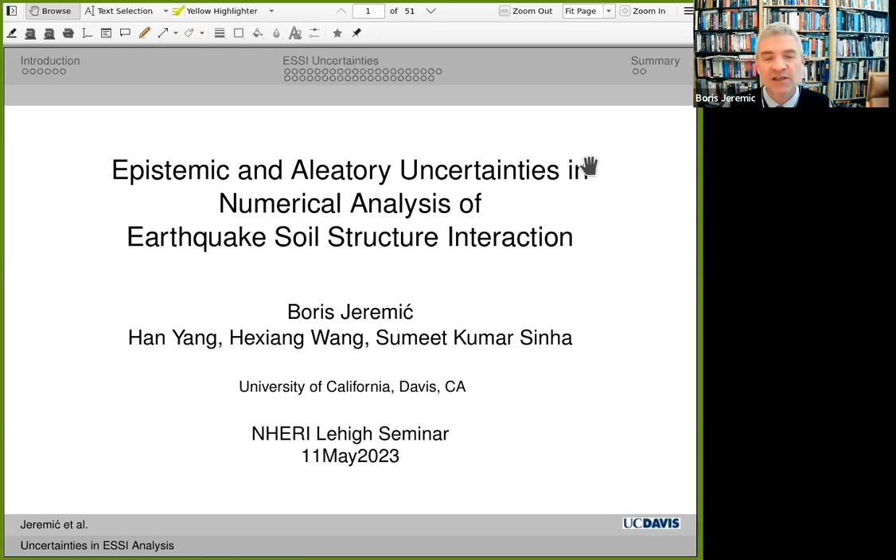So with that, I'll just go straight ahead. And the main interest really is to improve or to give engineers tools to improve safety and economy of infrastructure objects. We want to actually be able to improve the analysis, because at the end, everything is a model, and we need to decide on shapes and materials we use to design those objects and to assess their behavior. So we would like to improve the analysis for those objects.

And really the interest is in both statics and dynamics, but one of the most serious types of loading is earthquakes. And this applies to both soils and structures. In my view, there's no difference. You need to know soil, you need to know structure. You cannot separate those two.

There are essentially two main types of uncertainties that we have to deal with. The first one is what I call modeling uncertainties. Some of my senior colleagues tell me, well, it should be really called epistemic. And I agree, okay, fine. If people know them as epistemic, that's fine. But these are really modeling. I'll spend some time on those. And then of course, there are aleatory, there are parametric uncertainties. Our materials are variable, they're very uncertain, and we need to take that into account as well.

Our goal should be to predict and inform. We should be predicting and informing the audience, the engineers, because engineer needs to know. Engineer needs to know good news, bad news. Engineers need to know what is going to be the behavior of objects so that they can do what they need to do. They can improve them or change them or sign at the bottom of design drawings or not sign at the bottom of design drawings.

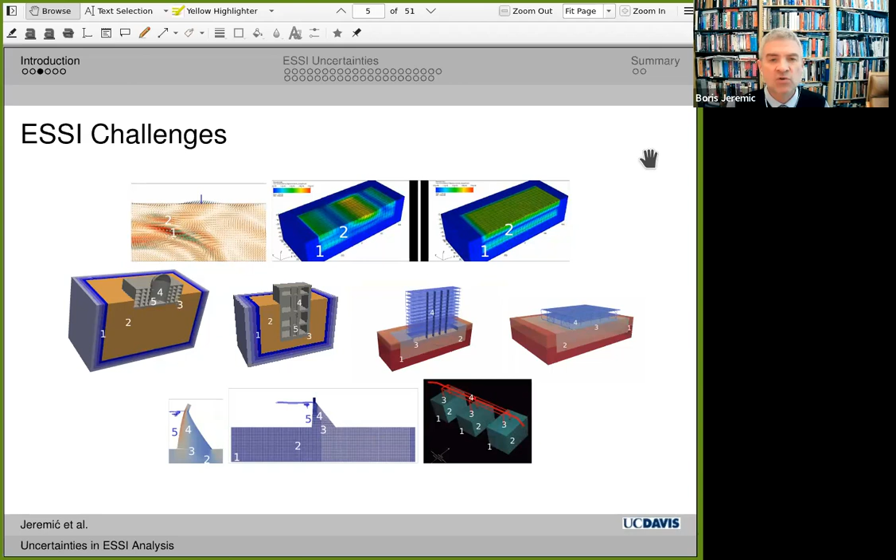And it's very similar for free field behavior, for interaction with some structures. Some important, some less important. They're all important, but some of them are very important, like nuclear power plants. Some of our buildings, and then of course dams and bridges. It's a very similar set of modeling tools, analysis tools or similar challenges that we need to address.

The two main types of uncertainties are really modeling uncertainties and parametric uncertainties. When we make those models, usually finite elements, we do make simplifications. We simplify models because there's no way we can model every single atom and so on. So we go from particles to solids and then to structures. But we need to be able to change modeling sophistication level so that we have a good confidence in our results. And then once you decide on the level of sophistication for your model, you have to propagate parametric uncertainties.

Our components of our system are very uncertain. Mostly stiffness, but also viscous damping part, and mass. They are uncertain. The loads are also very uncertain, and so we need to be able to propagate those uncertainties through the equations, through our behavior. And we would like to have the results be full probability distributions for everything, for displacements, velocities, accelerations, for stresses and strains, pretty much everything. And I'll show you we actually do that.

So let's focus a little bit on the modeling uncertainties. We have to sometimes simplify some of the important features. We used to have to do those. We don't have to do that anymore. There are good tools so that you don't need to simplify those out. And so, for example, the issue of one component motions versus three component motions.

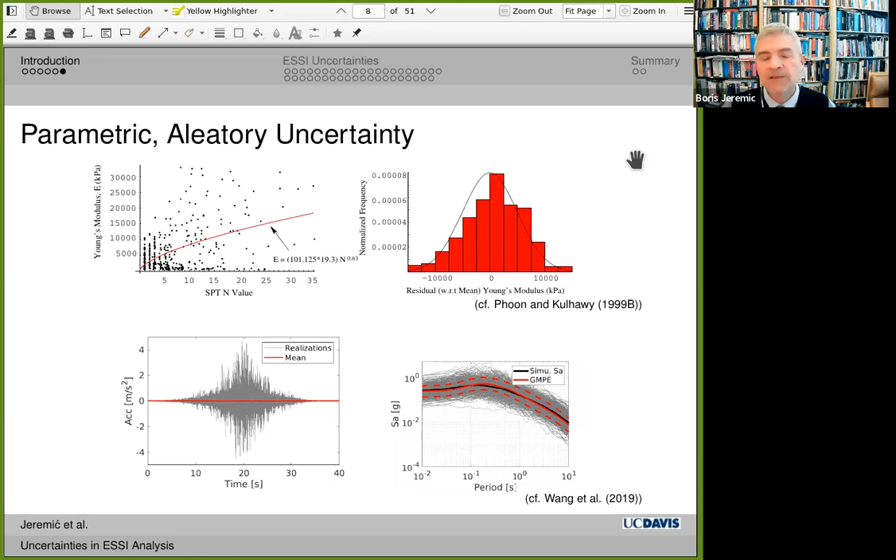So let's talk about some of these modeling uncertainties. I still call them modeling because that's close to my mind, but I understand they're epistemic. That's what they're called in mathematics circles. So, for example, do we use soil structure interaction or do we not? Well, there's sometimes a significant difference, sometimes not that significant. It's important that the engineer can show what the difference is and maybe neglect the influence of soil, but we can actually do much better nowadays.

Do we do one-dimensional, two-dimensional, or three-dimensional models? We can do nice three-dimensional models. Sometimes it doesn't make a difference, but you will not know unless you are actually able to do three-dimensional models. Seismic motions, I'll show a few examples. What if we just use one component motions? What does it do to our results? Are our results good enough for design and for assessment?

Elastic versus inelastic behavior. Again, material is always inelastic. Let the material decide if it wants to plastify or get damaged and so on or not. Let's not decide instead of the material what models to use. And then, of course, I'll briefly mention energy dissipation, because most of the damage and most of the behavior of soils, for example, and structural damage happens because of energy dissipation.

There's a trend to actually use viscous damping to model this energy dissipation. That is not quite right. The physics of viscous damping is very different than the physics of inelasticity. So it's important to use appropriate models for appropriate physics.

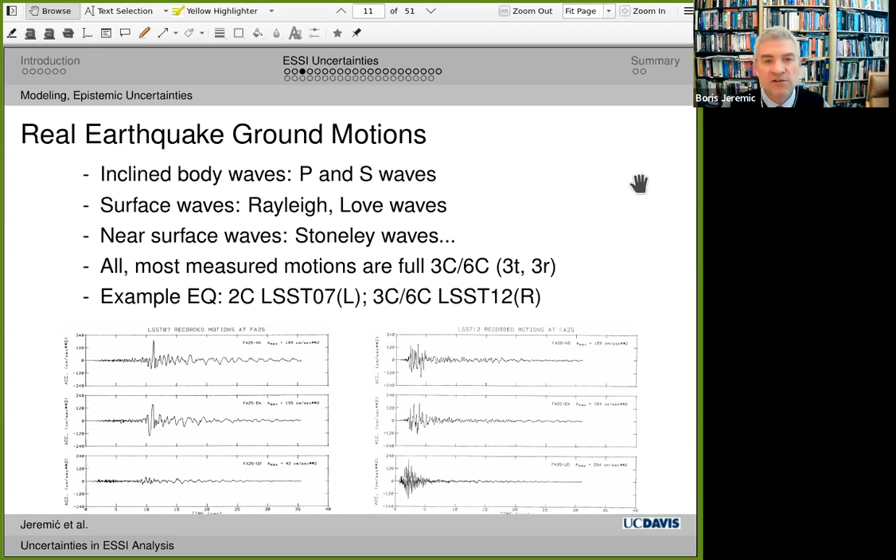And you see there's a full up and down. And the first part, remember, the first couple of seconds of up and down are essentially just the P wave. And then after that, it's a surface wave. So again, we know that motions are mostly six-component motions, three components plus three rotations. We need to be able to model those. So I'll show you a simple example we did just to demonstrate this.

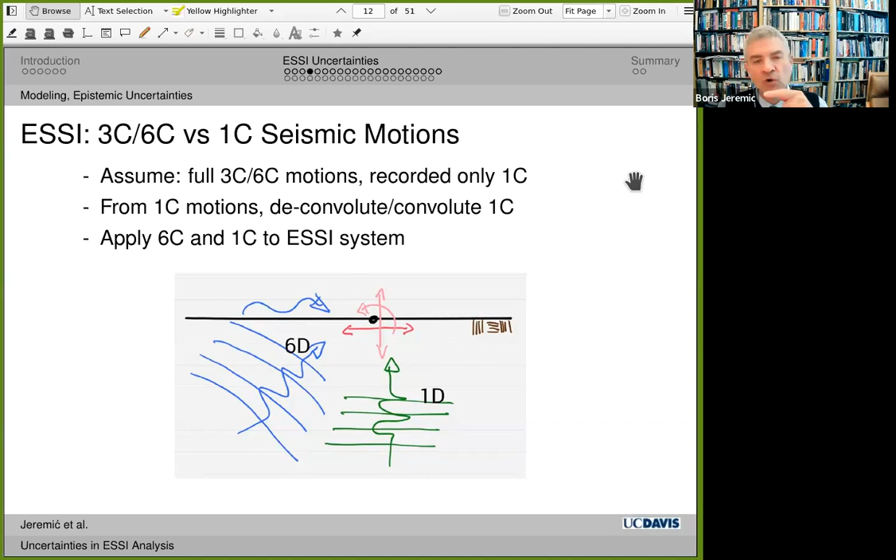Let's say that we have full three-component motions, but we only record one component. We just pretend that only one component is recorded. And then we can use that one component, do deconvolution, and propagate back as one-component motions. And this is how it looks. This is a simplified model we did just to demonstrate. Again, it's a very simplified model.

You can think of it as a regional scale model. There's a point source, which again is not quite true, but it serves the purpose. There are layers. There's a rock layer, there's a little stiffer layer of soil, and then a softer layer of soil. And the location you see on top where that line is, that's the location of the object. It's not an object, just a location.

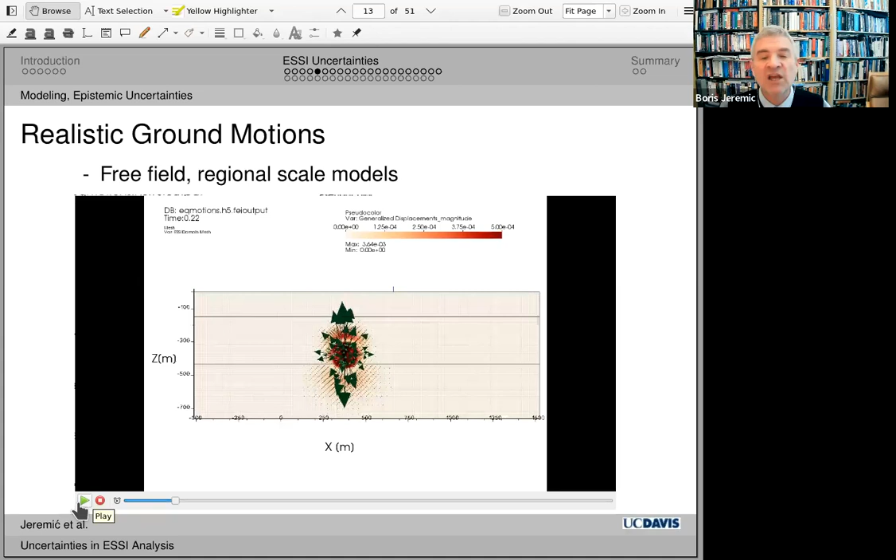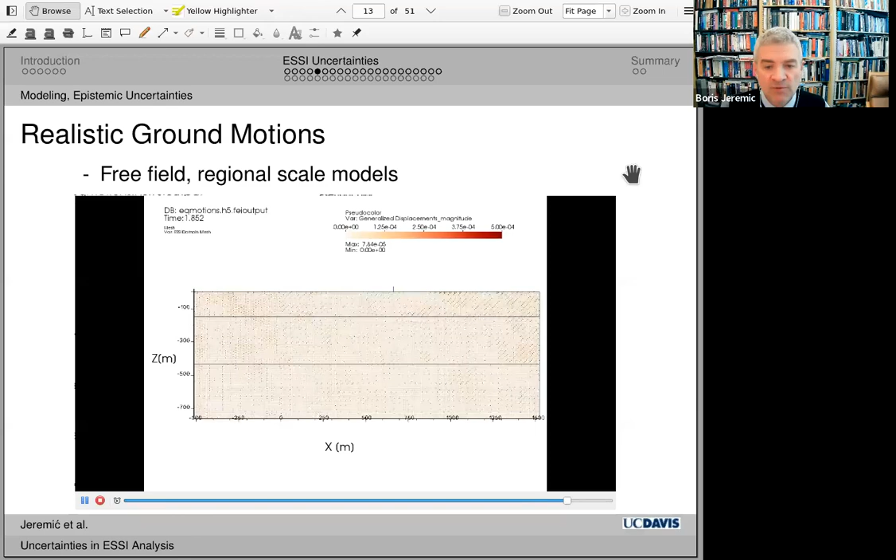But we can see that these motions propagate, and we see the reflections and refractions through the layers, and this is what we also observe a lot of times when we measure those motions. If I go close to this object here, this is how it looks. Please note that there will be a lot of these surface waves, and these are Rayleigh waves, the ones we teach students. These are the same ones we actually record.

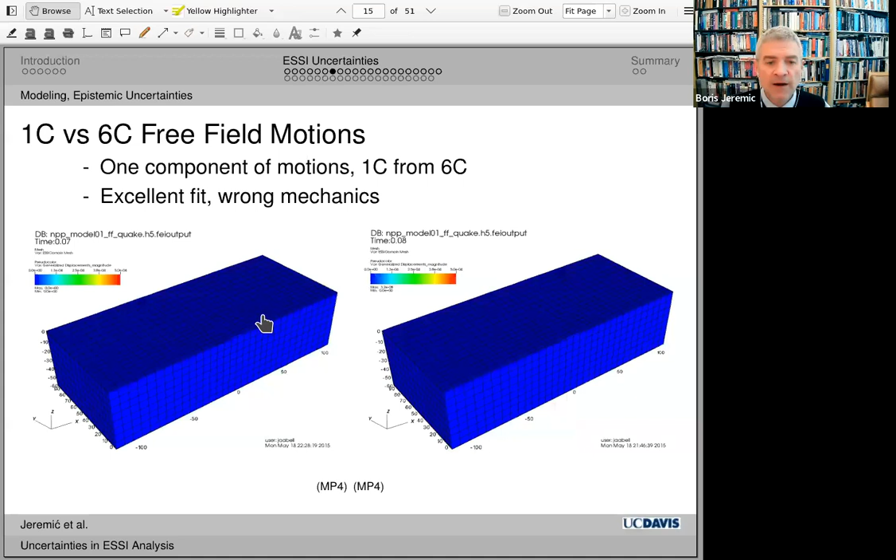So now, if I use these waves, this realistic wave field, a very simplified source but a very realistic wave field, I can input that into my free field model, and this is how it looks. This is input in the free field model using the domain reduction method Jacobo Bielak invented a little over 20 years ago. It's a beautiful method, the best method to input motions in any model. So this is how it looks in real life.

And then if I do the one-component motions, this is how it's going to look. I took those motions at the surface, and I pretended they're just one-component motions. Let's see how the system behaves, and it behaves like this. So the left one is the real motion, the right one is the one-component motion that we most of the time actually use.

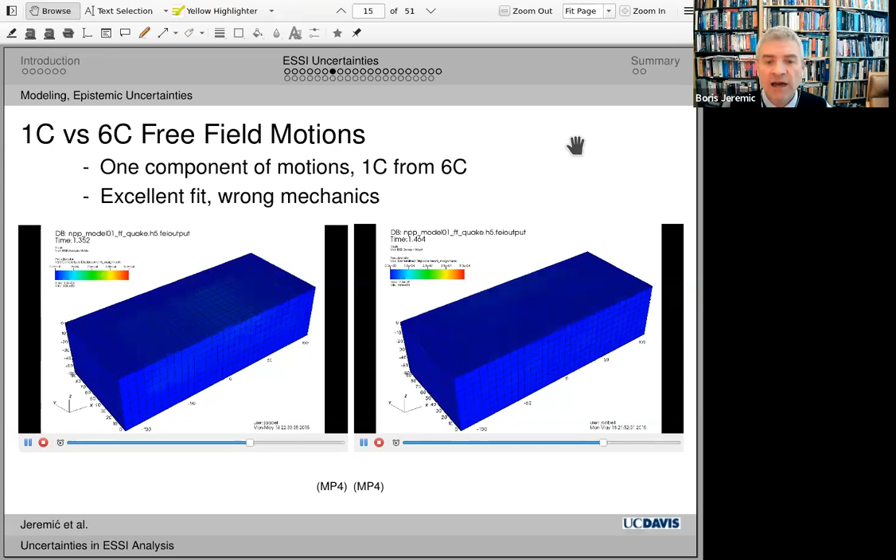And I would say that the physics between the motions on the left side and the motions on the right side is quite different, and I expect to see different behavior. How important that difference in behavior is, well, I can show that too. Here's an important object. Let it remain unnamed.

It's a full 3D model, but what we did in post-processing was take the left side, which shows the full three-dimensional motions, the 6-component motions, including rotations. The right side includes only those one-component motions, and you'll see the difference. It's a very different behavior. The left side has a lot of these vertical motions that come from the actual Rayleigh wave, from the surface wave. The right side does not have those. So again, the behavior is going to be quite different.

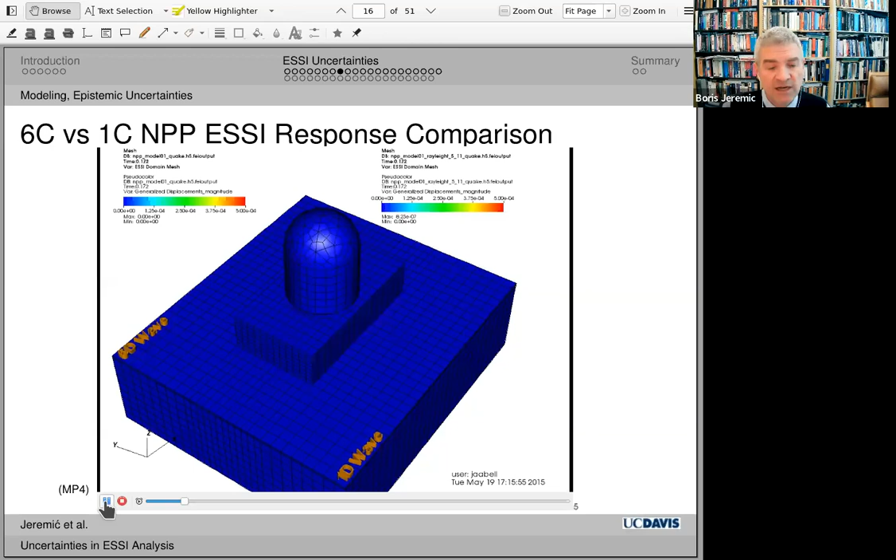And then I get questions: which one is on the safe side? Well, you can't say that. I mean, the safe side is the one on the left side, because the one on the left side shows realistic motions. The one on the right side shows unrealistic behavior from unrealistic motions.

So I would always take the more realistic behavior, because that helps me as an engineer to decide about the shapes and materials and so on for my object. And then, of course, again, the issue of wave fields, what kind of wave fields we use in modeling. So let's look at those so-called stress test motions.

In addition to these realistic motions that come from some depth or from some real earthquakes, which we developed by essentially doing regional scale models, or, now we actually have a methodology that by using some surface measurements, we can actually develop a full wave field at depth, and we can propagate that back in there. What we can also do is we can propagate some analytic wave fields.

There's a set of papers by Thomson, and then there's another set of papers by Haskell from the 1950s. 1950 Thomson and 1953 Haskell, where they provide closed-form solutions for layered media for the inclined wave, and we use that to input through DRM into our model.

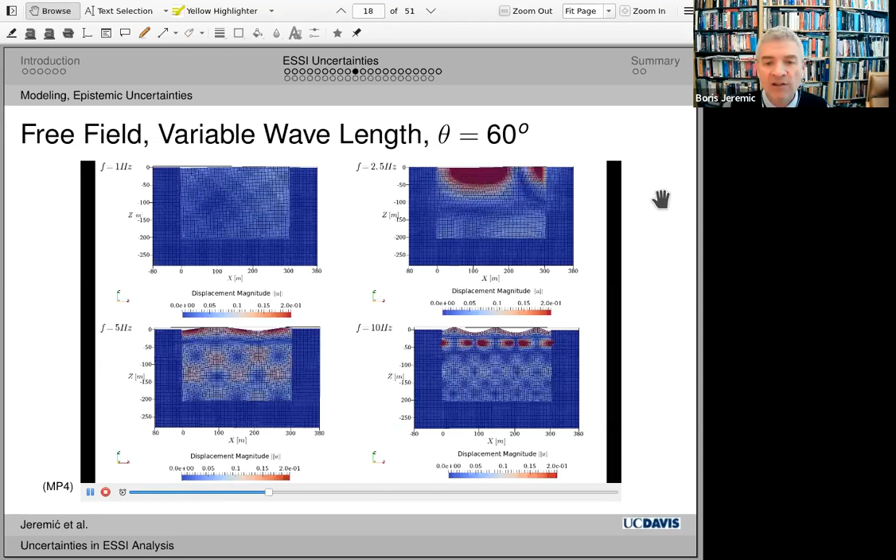And of course, the wavelength is going to make a difference depending on the size of the object. And so your object might not even see some of the waves depending on the stiffness, of course. But this is important. Those high frequencies become very important for industrial objects. So behavior can be very different, and you need to be able to model that.

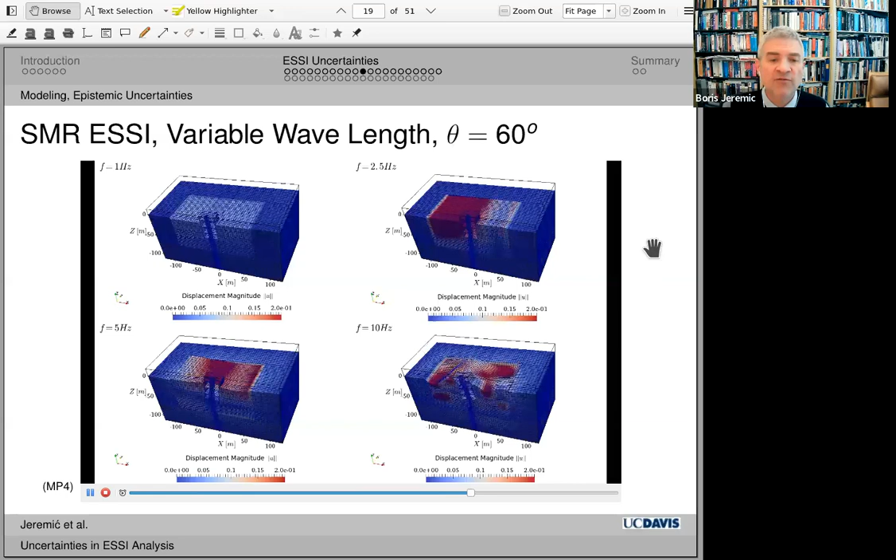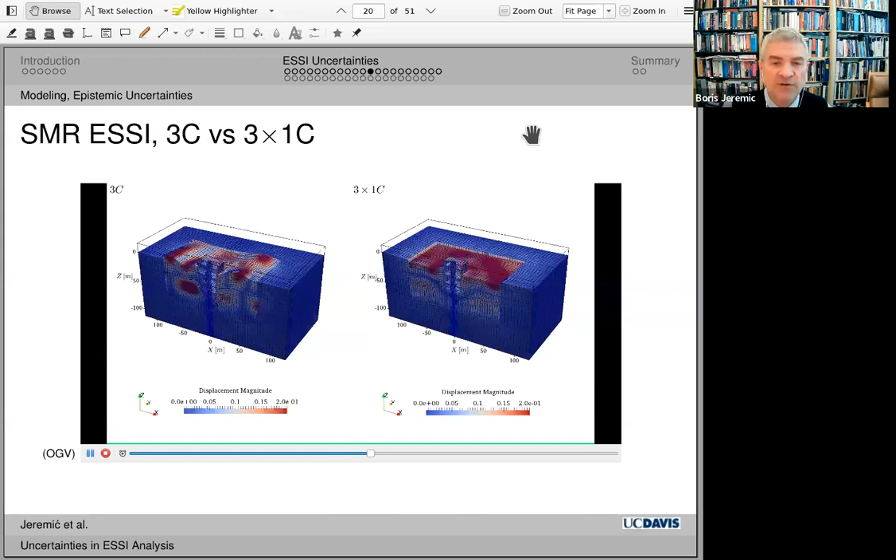And then, of course, the big discussion, should you use SSI or non-SSI? Well, soil is always down there. You can't get rid of it, soil or rock. They say if it's a very hard rock, you don't need to. Well, there are differences, sometimes more significant. If it's soil, the differences are always significant.

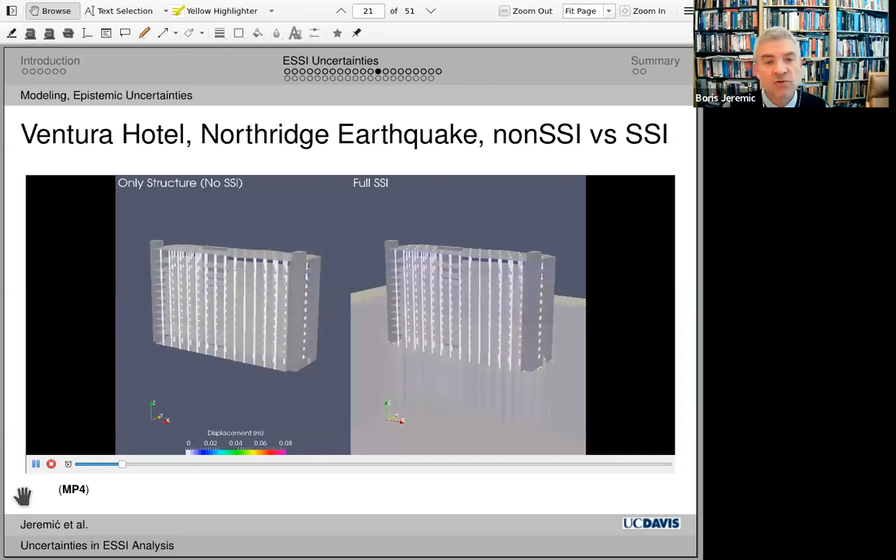This is an example, the Ventura Hotel, a famous hotel in Southern California that was shaken a few times. We did an elaborate model of this hotel, and we did an SSI and a non-SSI model, and we compared with some of the motions that were recorded, and the full SSI model does really well. The non-SSI model doesn't do well. You can fiddle with parameters, you can do this, you can do that, but it doesn't do well. So the conclusion is that you need to do full SSI just to get the good behavior of models.

So the energy dissipation. The energy dissipation is important because that's what brings damage to our systems. And we can calculate the energy input using DRM, and then we can calculate different ways of dissipating energy in the system. And there's radiation damping that we know about, but then there's also all sorts of energy dissipation and conversions inside the SSI system, and those are really important because they are the ones that bring either settlement in soil or some slippage in soil or damage in structures. And so we need to be able to model those properly.

And of course, there's one component that is rarely taken into account. It's numerical damping. Whenever you use Newmark or HHT or any of those methods to integrate in time, you dissipate energy in the system numerically. You can even produce energy, and you need to be able to control that. And this is important to control. And we can control that. We have a way of controlling.

We have a way of analytically calculating energy dissipation at every single Gauss point, every single finite element, and we can plot those and we can show what they are. And then, of course, engineers should be able to go back and forth and learn about where the energy dissipates and what's the influence of numerical damping, what's the influence of viscous damping, how to choose those parameters. That's important.

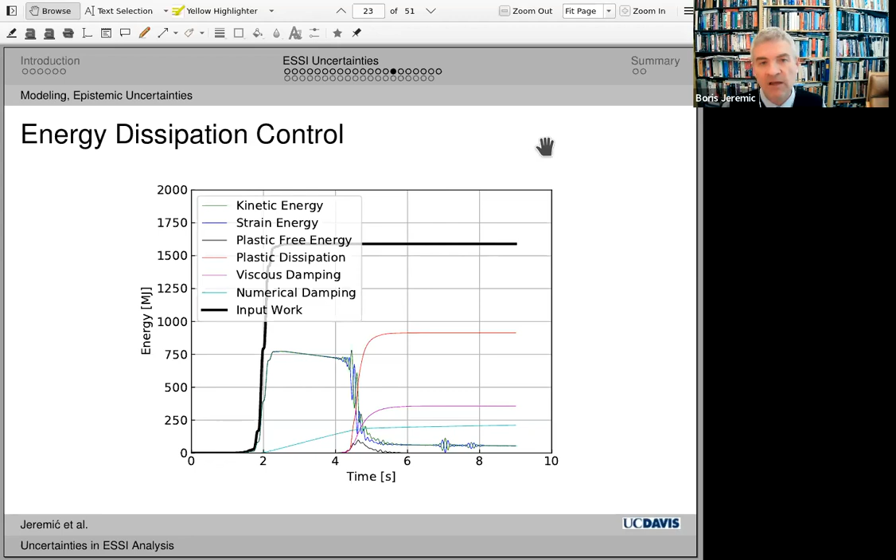One really important note here is that the plastic energy dissipation is not the same as plastic work. The stress strain loop is not plastic dissipation. My applied mechanics colleagues know this, and I remember when I talked to one of the colleagues across the hall, he said, of course, everybody knows this. I realized this maybe 10, 15 years ago, and I was shocked because I thought that the stress strain loop or load displacement loop is actually plastic dissipation. It is not, it's plastic work. There's something called a plastic free energy that's missing.

And this was shown by a fellow named Geoffrey Taylor 100 years ago. He has a series of papers starting in 1925, I think the last one came in 1934. They did some tests on copper. He showed this, and applied mechanics people know this. Civil engineers are not very familiar with this.

This is important because, how did I learn about this? Well, I did some tests and I wanted to convince myself that what I do is right. And then I plot and I see there's a negative dissipation. This can't be, thermodynamics says this cannot be. So I spent 2 years trying to figure out what's wrong, and I learned about this work. And so the load displacement loops and stress strain loops, the surface area of those is not plastic dissipation. We can calculate plastic dissipation very accurately.

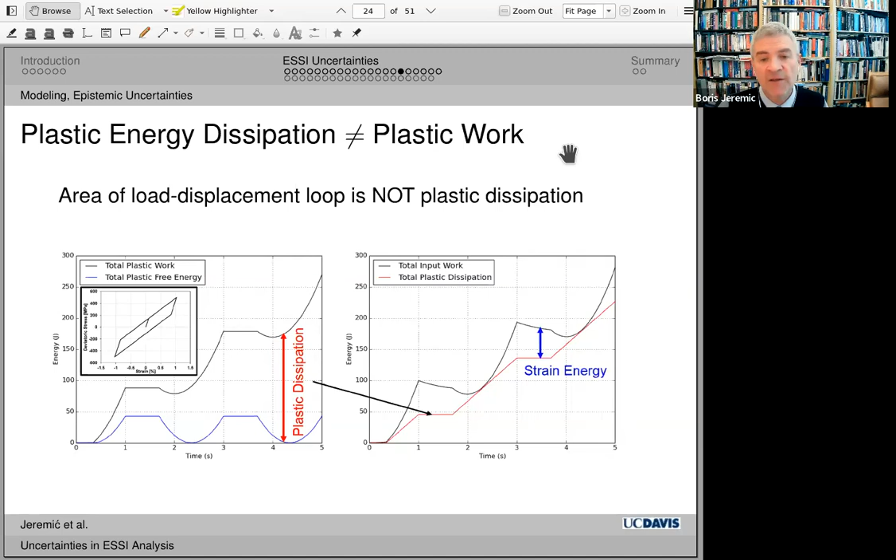So one of the issues, of course, always is should we use elastic? And then we say we over design, and then we say we are on the safe side. Maybe not so. There are ways to show that you're not on the safe side if you over design. But one of the things, for example, if you use elastic and inelastic, actually inelastic can help you. Inelastic is going to dissipate some of the energy down in the soil and some of that seismic energy is not going to propagate through the soil.

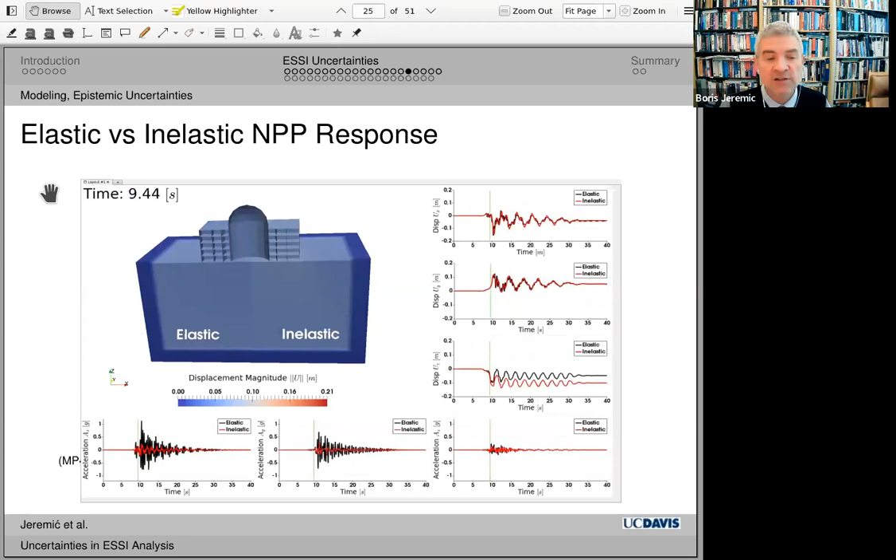But you then need to also take into account that there will be additional settlement, and you need to be able to model that, in order to make sure that your object is functional after an earthquake. Because if you settle more, for example, for nuclear power plants, there are some things called umbilical cords, the connections with power and water and whatnot. You need to make sure that they can take a little extra deformation. So being able to do this properly using inelastic response, material, soil and structure both, and especially the interfaces, is very important. And then, of course, you can look at the energy dissipation and use that.

You might end up with a little bit extra settlement, but there's a slippage, and then that prevented all that energy from going through the system. So this is important. This has to be properly modeled.

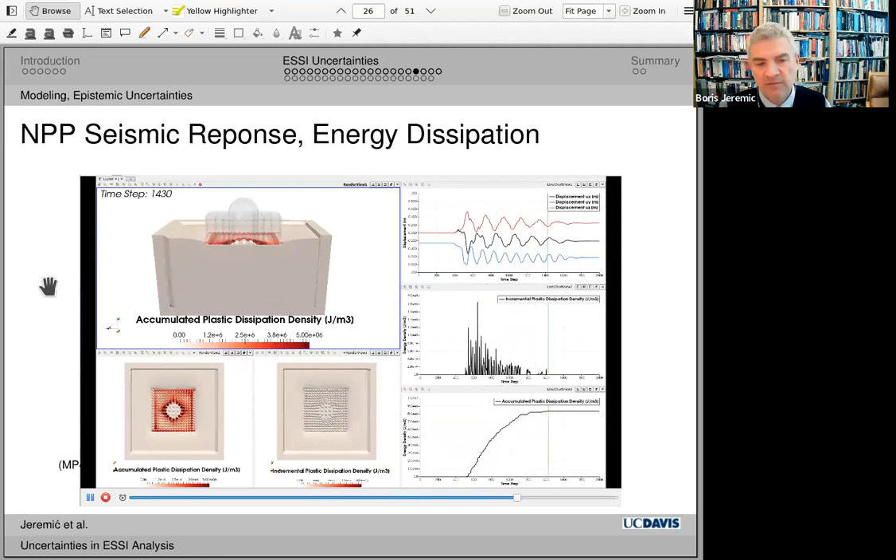And again, we can do this, and I won't go into much detail of this, but if the object is deeply embedded, like that SMR, that small modular reactor I was showing you, you see that, for example, most of the dissipation happens close to the surface where the actual confinements are low, the slippage part, and then the other part of dissipation happens at the bottom where the actual soil is very compressed, but soil is going to plastify a lot. And so again, you have to be able to properly follow the actual energy through the system.

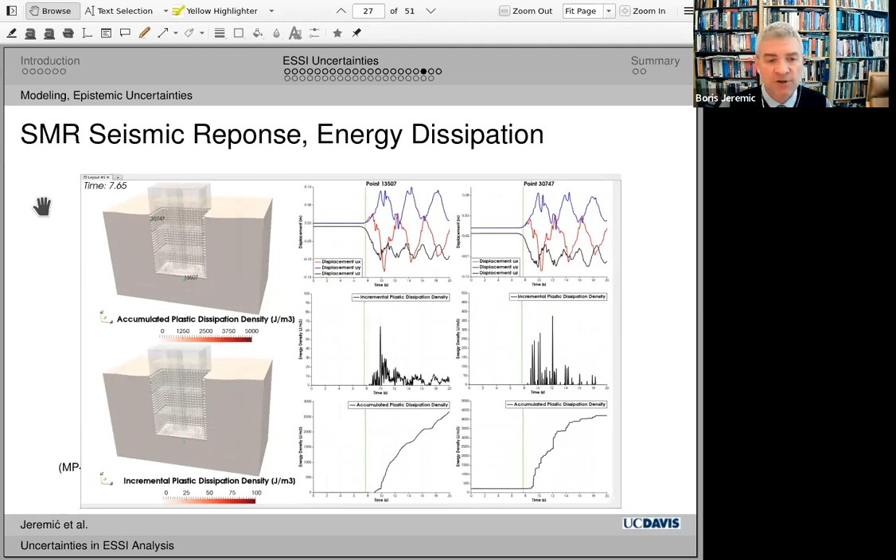And then maybe change shapes and change materials, maybe weaken materials. This is the story when you put the actual energy dissipators in the system, base isolators also, you're essentially controlling where the energy goes. You can then, of course, use that to change design.

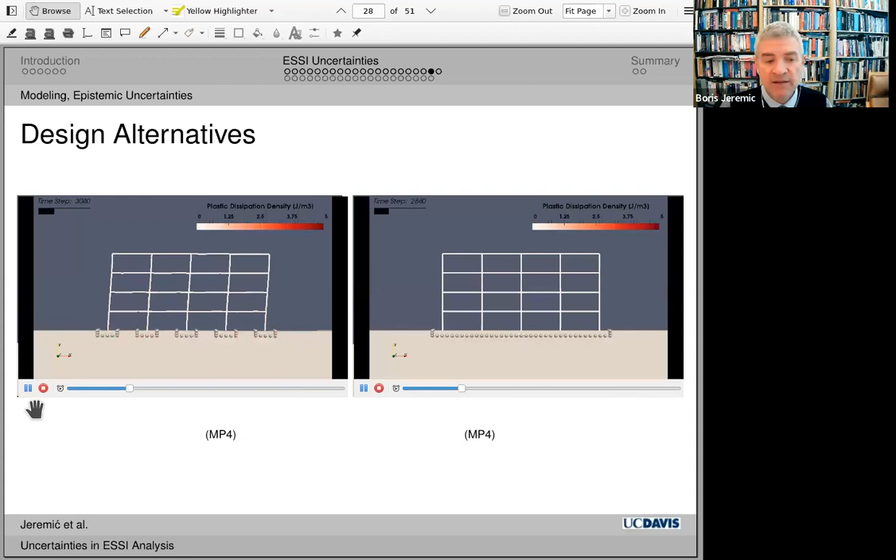So here's a simple frame. This is a standard PEER frame developed many years ago. And with this frame, now you have a choice, for example, for foundations, if I have two types of foundations. The foundation, the slab on the right side, dissipates much more energy in the interfaces and in the soil. And I on purpose showed the same scale, the coloring scheme is the same for both of those.

So you see a lot more dissipation in soil and interfaces, and then you look at the structure. There's a dissipation here in these corners, but there's also dissipation here as well. If you look on the right side, there's quite a bit less dissipation in the structural components. We actually have numbers, but just by judging by colors, a lot less dissipation because, of course, it's a different static system.

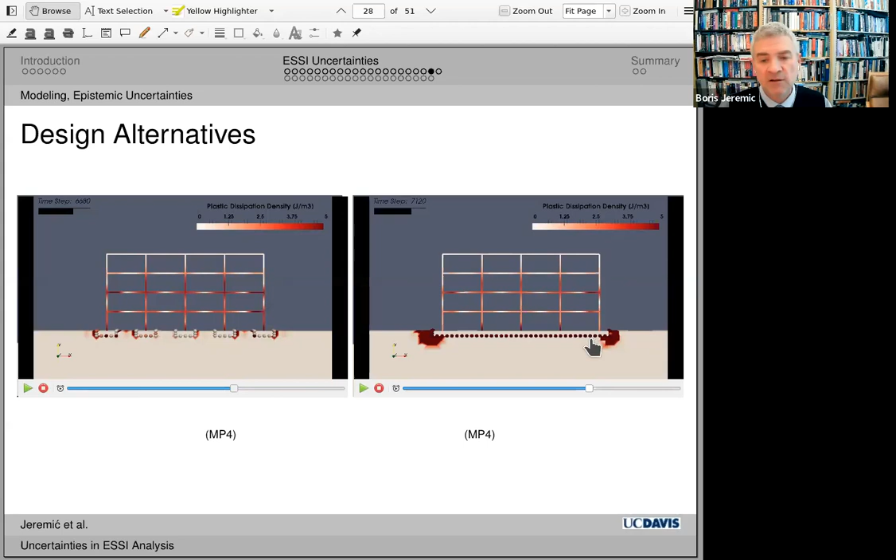This is a little stiffer down at the bottom, but nevertheless, a lot of the dissipation happened in the foundation. The actual seismic energy did not propagate through the system up to the structure, so this structure on the right survived much better. Again, this is important.

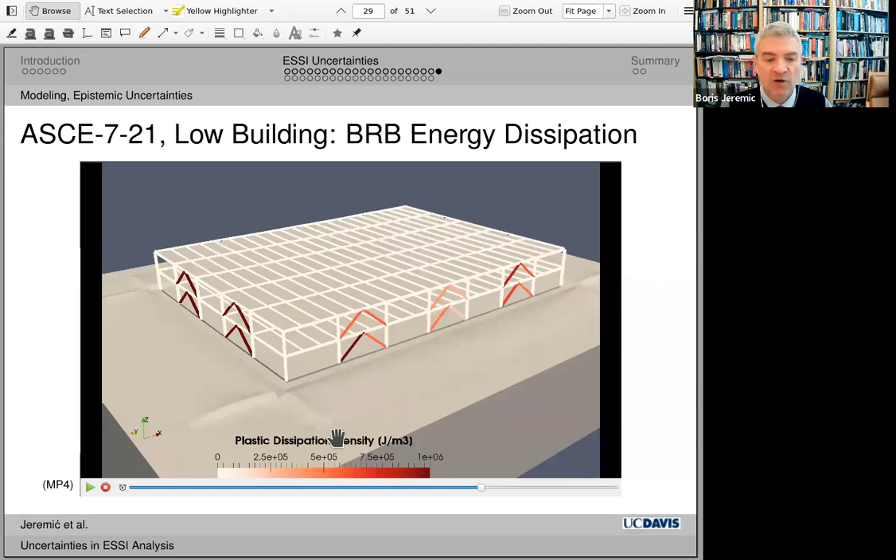One interesting observation was that some of the structural colleagues told me that, with a 3-field set of BRBs, they would always just subdivide into 1/3, 1/3, 1/3. It turns out that, remember, whenever you plastify, there will be redistribution of loading. In this case, the two side fields take most of the loading. The middle field does not actually take that much loading.

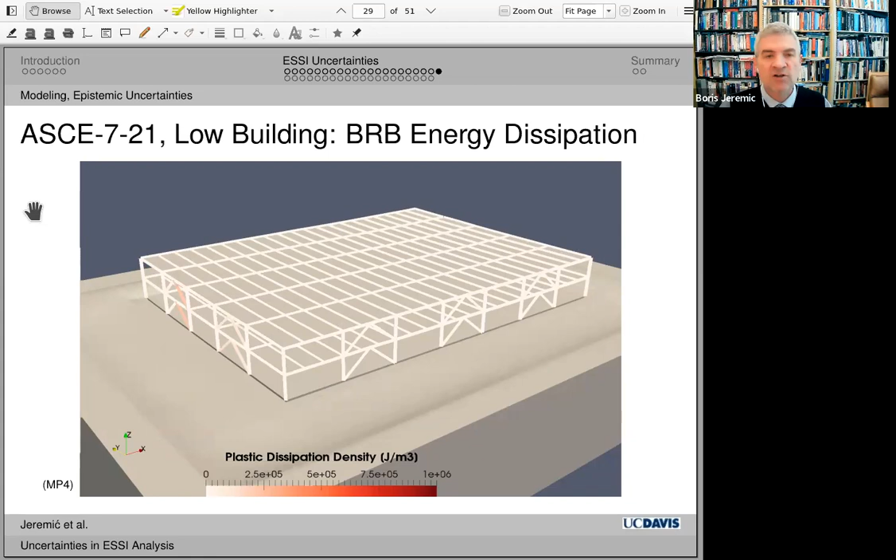And so this is an interesting observation from high quality, high-end modeling of a non-linear soil-structure system. So again, the point being that you need to be able to do proper modeling with the proper level of sophistication, both structure and soil, and decide the behavior of the system.

Once you do that, of course, you need to go back and address the other hard issue, and that is the parametric uncertainty, the aleatory uncertainty. We know that our components are uncertain. The material is variable. We don't know exactly what the material parameters are. For mass, it's fairly certain. Viscous damping is kind of uncertain, but stiffness is very uncertain. And the loads are very uncertain. So we need to be able to address that.

So what we started doing some years ago was, given uncertain material and given uncertain loads, what is the uncertain response? How is the response of the system going to look? And instead of using Monte Carlo, which is much simpler than what we did, but has many inefficiencies, it's slow and has slow convergence to very accurate solutions, we wanted to skip that. And we used the stochastic finite elements that Roger Ghanem and Pol Spanos developed three decades ago.

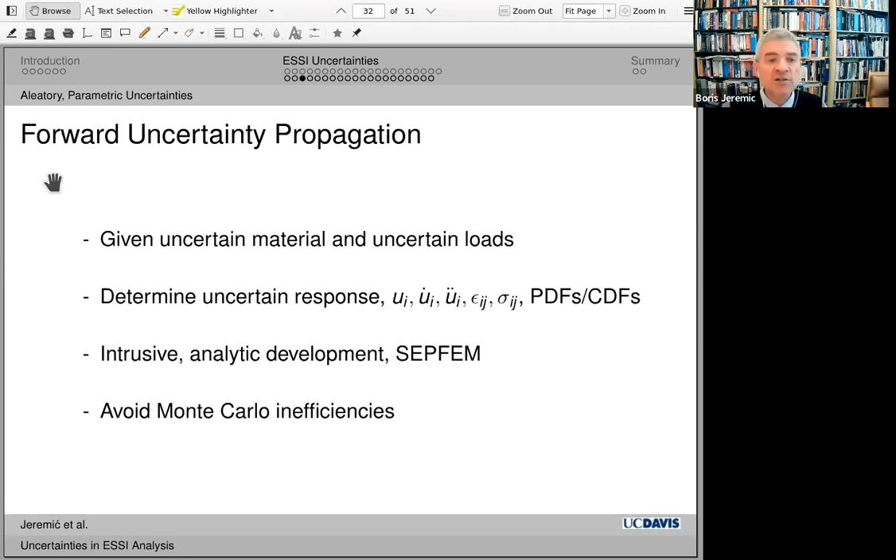But we extended those into elastoplasticity. So we actually now have so-called stochastic elastic plastic finite elements. It's a so-called intrusive approach because we actually go inside and we change our finite element equations, and the system becomes very large, but it's orders of magnitude faster and more accurate than the actual Monte Carlo.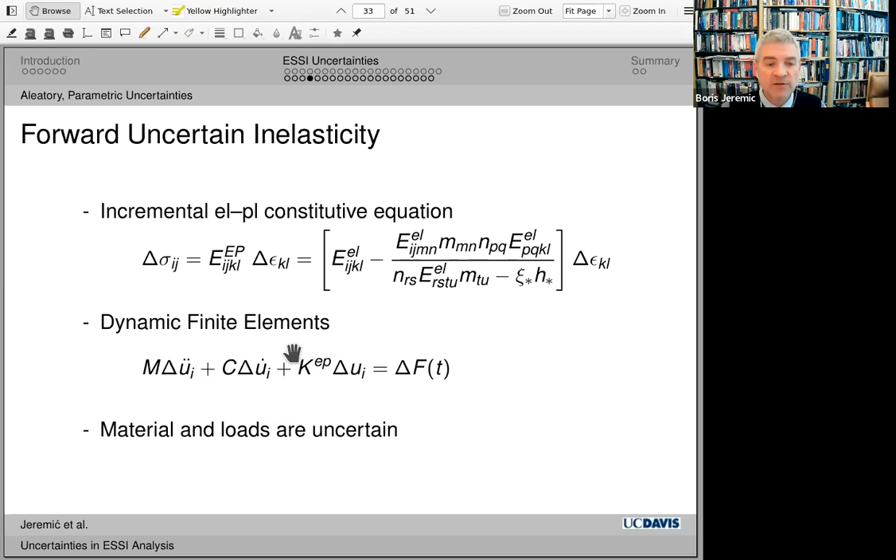Here's what it does. Essentially, we have a simple elastic plastic incremental equation. All of these components inside become uncertain, including the actual strain. And then all this uncertainty goes back to the actual finite element system. And, simplified, just to demonstrate what this means, let's say you have a simple elastic linear hardening material. Your deterministic solution will be starting from 0. Material is going to go here, it's going to yield, it's going to continue with this red line, and this

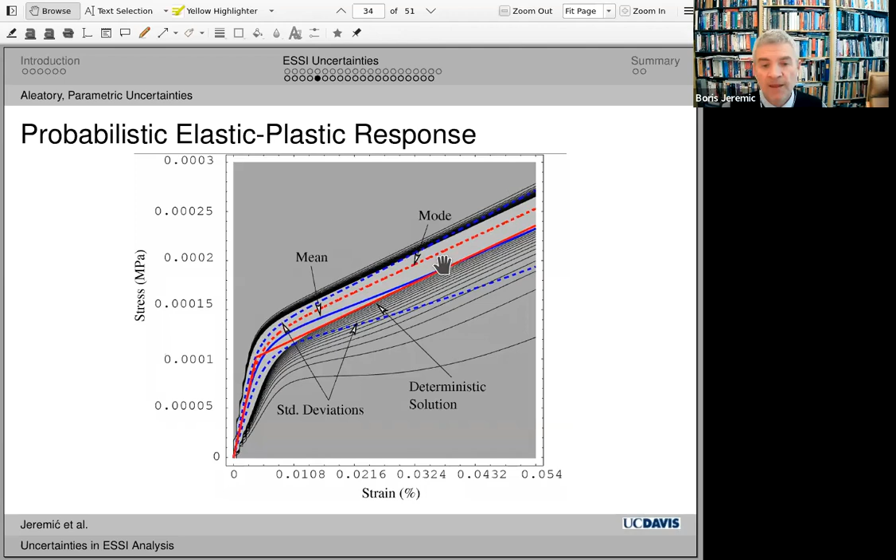is your response. Once you decide that you want to have uncertain elasticity and uncertain plasticity, your response is going to become uncertain. Your response is not going to be a single set of points, stress strain or a single line. It's going to become a distribution. So in this case, distribution will have its own mean, and then its own mode, the most likely outcome. It's going to have plus minus sigma, plus minus some variation, but it's going to be a full distribution. And this is what we wanted to do. This is what we are doing currently.

For example, a lot of people know about Cam Clay model, very simple but beautiful, elegant model that actually only works for monotonic loading. The interesting observation here is that your deterministic line, your deterministic predictions are away from the mode line, from the most likely outcome.

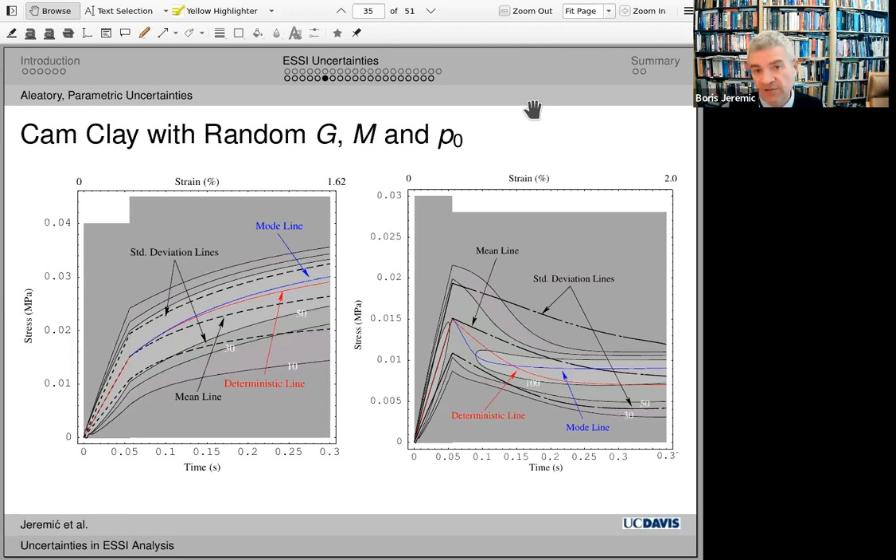And it can flip and flop up and down, which means that your deterministic solution, of course, depending on the parameters and uncertainties in G, the shear modulus, and the slope of the critical state and the P naught, the previous highest confinement, depending on the uncertainties in those, you can be on the safe side or you can be on the unsafe side. And that should make a difference. That can make a difference in your decision-making process.

So again, I'm not going to go into details. I'll just show briefly. So these dynamic finite elements, the stochastic elastic plastic finite elements, we take the input random field of the material, we take the input random process of the loads, and we expand those in multidimensional Hermite polynomial chaos. And we essentially are developing those input variables, the multidimensional Hermite polynomial chaos with unknown coefficients, and it's a complete probabilistic response.

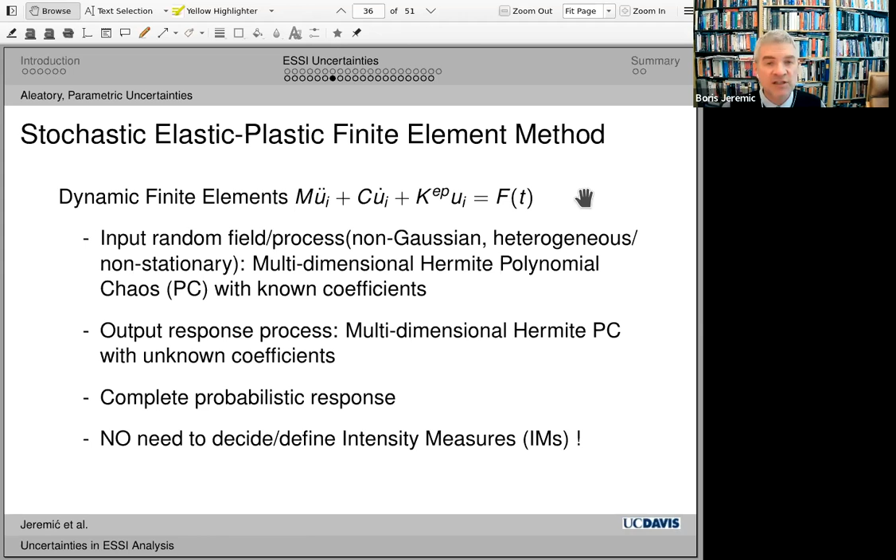One important thing about this approach is that you do not need to define intensity measures. All of the probabilities are inside. The probabilities of material, the probabilities of input motions, they're all inside. You do not need to decide on intensity measures. You do not need to make any choice.

So here's an illustration. So here's a simple, very soft cantilever with some nodes. And what I'm showing here are the actual 50th percentile, the mode. It's a symmetric distribution in this case. So it's a very simple cantilever that is behaving elastically, essentially. And I hit the top, I move the top, and the wave starts to propagate downward. And what I'm showing on the right side is the actual fragility, the fragility of the displacements of the top node. And you see that they dynamically change as the wave propagates and as the system shakes.

But I actually have a full information about every single node. I can plot fragilities or probability density functions for every component of this model. And based on that, I can make some decisions. This is giving me far more information than if I had to choose some intensity measure and then I just pick up one component and then I have to run few of those using Monte Carlo. In this case, I get the full probabilistic response.

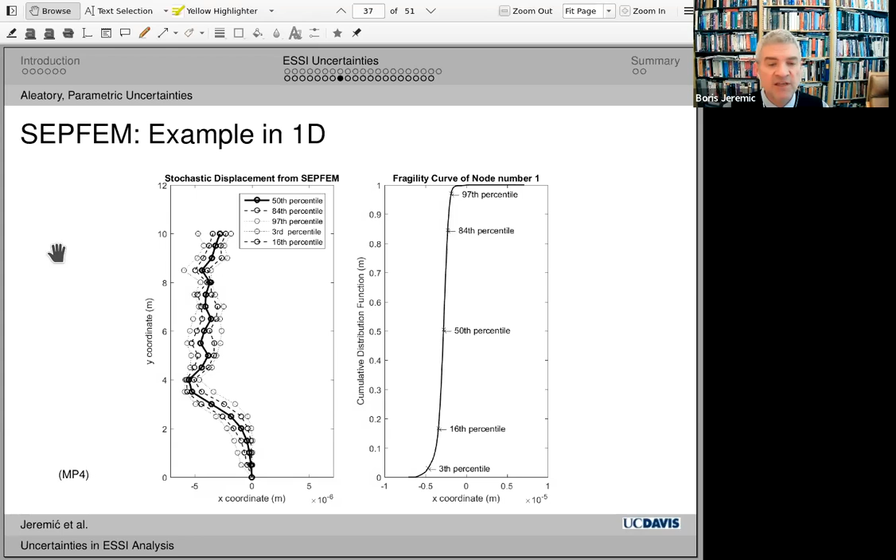So where is this applicable? Well, for example, let's do a simple example of seismic hazard. In California, we are lucky or unlucky that we have a lot of earthquakes. So there was a lot of work on earthquakes, and so we have the so-called UCERF maps. We have a very good knowledge about faults and about the rates of slip and whatnot. And so we can use that to develop some motions, and we can develop a characterization for those uncertain motions for some location.

Then we can go through the uncertain material, and we can go through stochastic elastic finite elements and develop a full uncertain response. And I'll show you an example. And then, of course, later on, we can develop full hazard risk for any component, anything that the engineer decides to do. So in this case, let's do a simple example.

This is a site. This is some location. This is actually downtown San Jose, a little bit south from where I am right now. We pick up two faults, San Gregorio fault and Calaveras fault. And we know from those USGS maps what the uncertainties are. We know the segmentations, we know slip rates, we know rupture geometry. We know about the uncertainties, and they're significant. You'll see they govern this response.

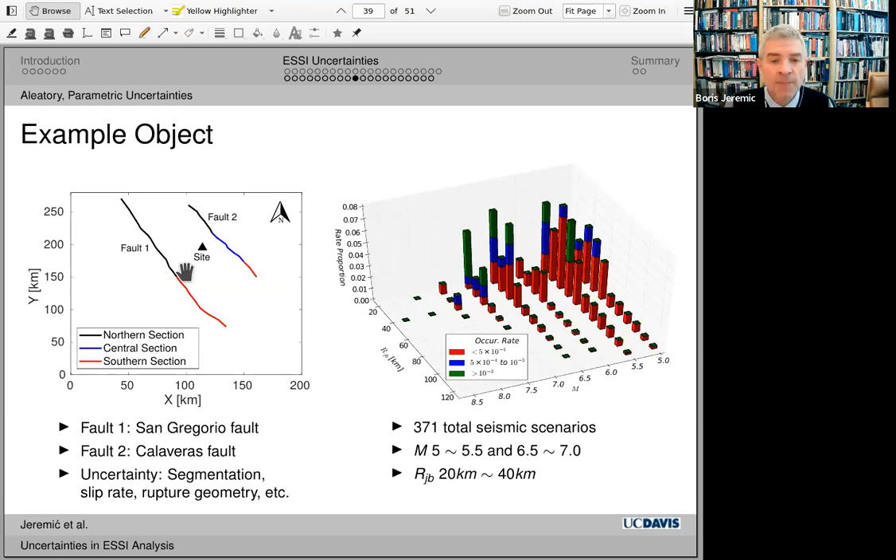And then what we can do, we can generate a large number of those seismic scenarios, and then we can use those to generate stochastic ground motions, which we then analyze stochastically, probabilistically, and develop characterization of those motions through polynomial chaos. And once you do that, of course, then you decide on your object.

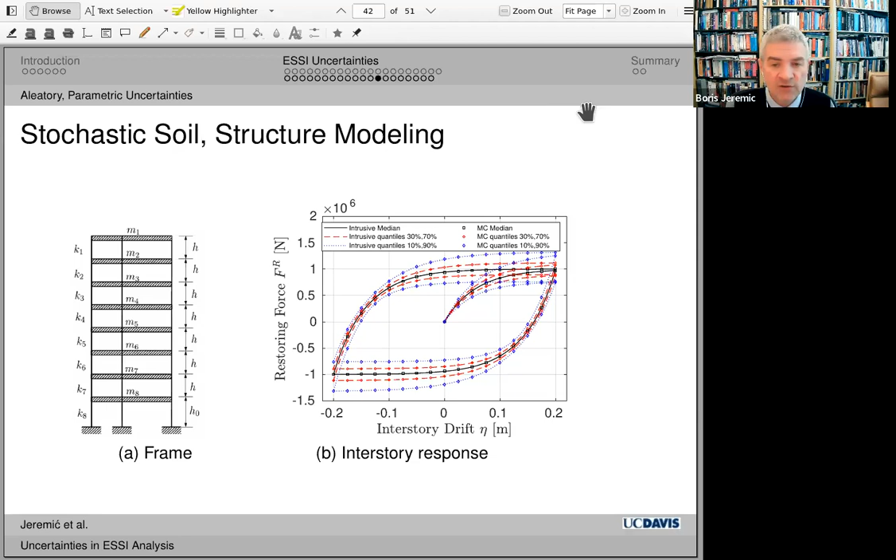In this case, it's essentially a one-dimensional shear beam. It's a structure that has very stiff interstory panels. And so we essentially provide some uncertain response, nonlinear inelastic response of those interstories. So it's essentially a 1D model, and you can of course extend this to soil beneath and so on. We load up that model with our uncertain loads, our uncertain earthquake from beneath. So it's uncertain loads and uncertain earthquakes.

And then, of course, what you get at the end is a full probabilistic response. We get full probabilities in each time step for all the displacements, all the velocities, all the accelerations, all the stresses, and all the strains. And then you can go inside this wealth. These are really large data sets that come out of this, but you can go in and just pick up whatever your heart wishes, whatever your soul wishes to look at.

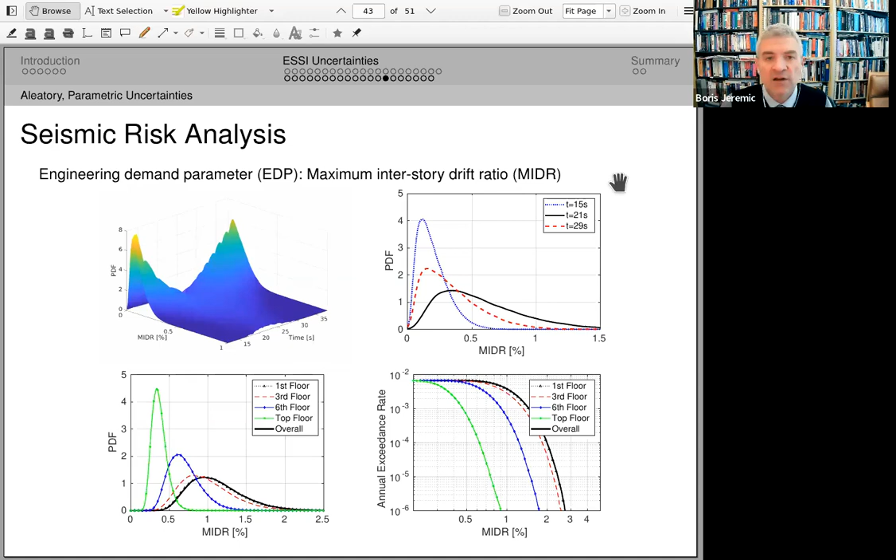Of course, the input is very significant, and the output is even more significant, large. But you have all the information that you need to decide on your object. Of course, you can do more. In the previous slide I showed just the interstory drift. You can do more because again you have everything. You can, for example, go for peak floor acceleration, and you have information about that for every location, for every finite element, for every node, and for every time point.

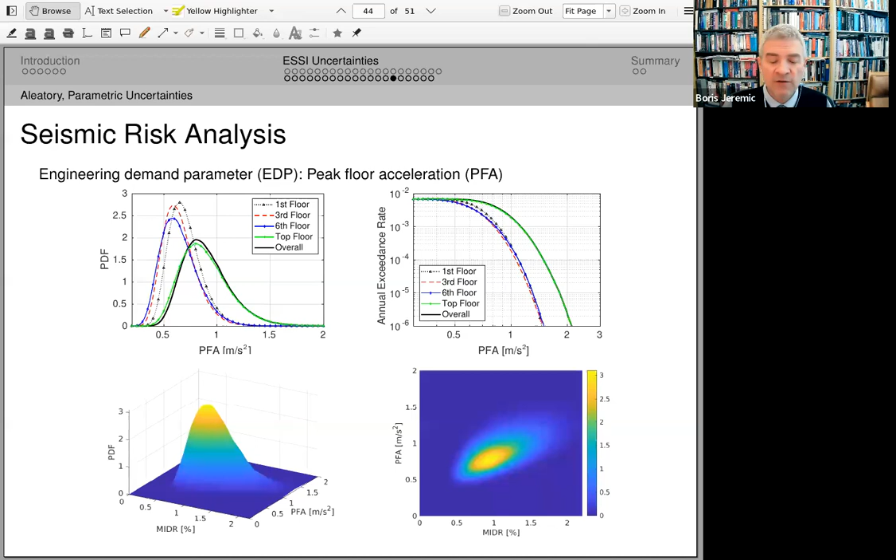And then you can combine those, because you have a full probabilistic response. You can then do marginal probabilities. You can combine those and look at probabilities of maximum interstory drift versus peak floor acceleration. And then you can define your damage measures on a single engineering demand parameter. Like in this case, what's the risk that you're going to have more than 0.5 interstory drift, or more than 1%, 2%, and so on, or what is the risk that you're going to have more than a certain acceleration for a certain story.

But you can actually combine them. You can define multiple EDPs, and you can now combine them. You can show, for example, what's the probability of having either 1% interstory drift or 1 meter per second squared acceleration, or what is the probability that you have both at the same time. And you can then define seismic risk based on those. So again, this is something that is very powerful in this approach, because it gives engineers a lot more power, a lot more good information about what is going to happen with the object.

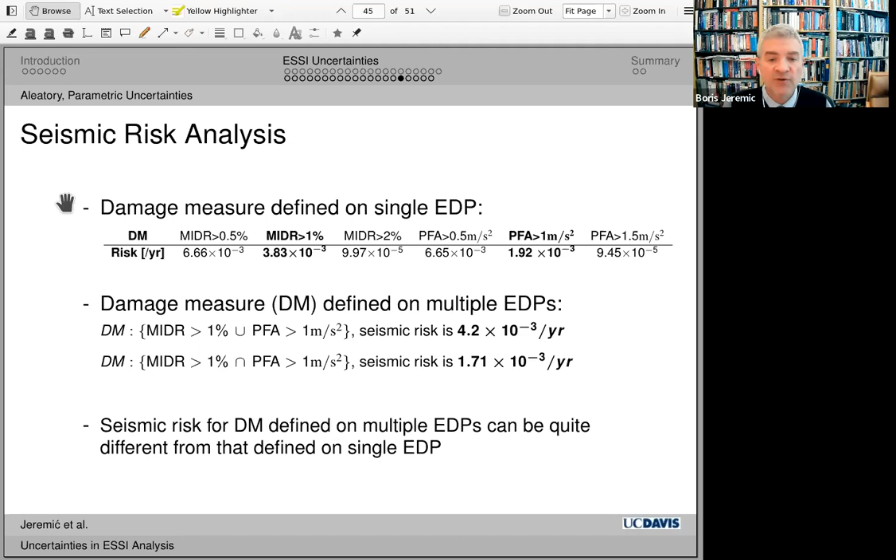And so these risks defined on multiple EDPs can actually be quite different from risks that are defined on a single EDP. Now, having said that, one of the things I've been thinking about for almost 20 years was, okay, so we have these input uncertainty parameters. How do we decide where to spend time and money?

And colleague Norm Abrahamson told me this 15, 20 years ago. He said that when they decide on free field motions, depending on who is in the room where decisions are made, somebody is going to push hard for looking in detail at the actual sources and path, the earthquake down at depth, in the rock. And then some other groups might push hard for the actual soil. What is the actual site response? And there was really no good rational way of deciding which way to go.

Now you can actually look at sensitivities. Given forward uncertainty response, the PDFs and CDFs I just showed, what are contributions of uncertain input to those forward uncertainties? In other words, for this site response, what is the influence of the uncertain earthquake in the rock at depth on final uncertainties? What is the influence of the uncertainty in soil parameters? So you can do the sensitivity to the input parameters, and that's something we've been doing for the last 3-4 years by using Sobol indices.

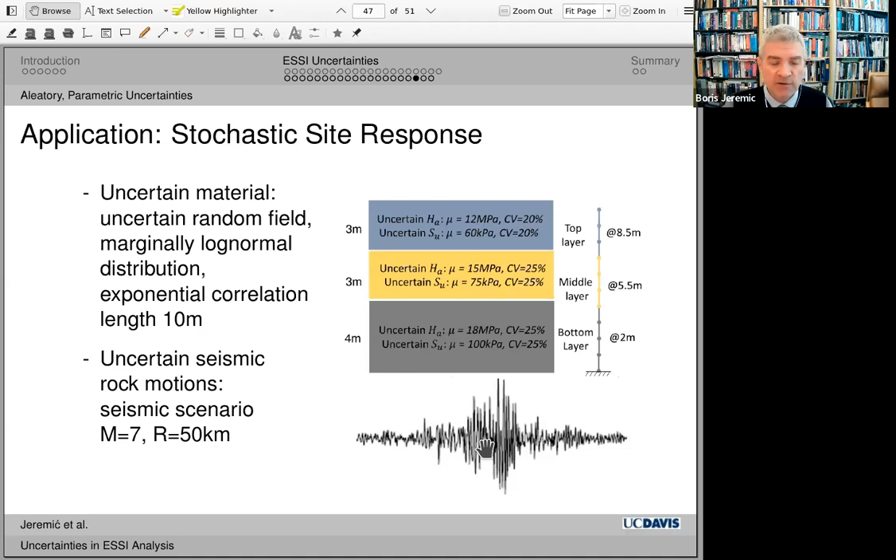So here's a simple example. In this example, we have the uncertain earthquake, one of the probabilistic scenarios. And then we have a simplified soil profile, and we know what the uncertainties of those material parameters are. We did this simple example just to show how this works, for this particular set of uncertain earthquakes and uncertain soil, again for some site somewhere in downtown San Jose.

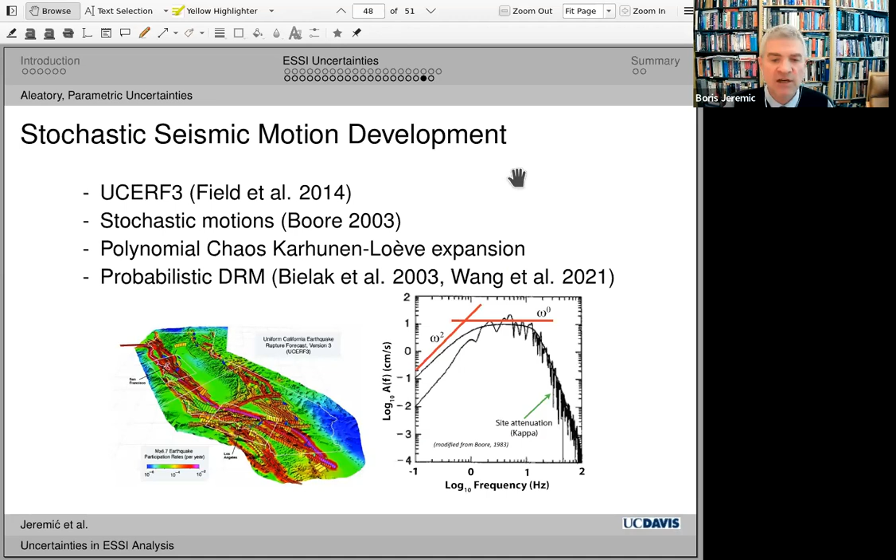We use those stochastic motions. We do polynomial chaos expansion, and we use probabilistic DRM, the same DRM that Bielak developed, now done probabilistically. Then we do probabilistic forward propagation, and then the sensitivity study. We have a full response, so we can look at the sensitivities of different demand parameters and different damage measures. In this case, we decided to look at the PGA, the peak ground acceleration.

But in this particular case, if I was to decide where to spend time and money, what to characterize better for this site, I would get much less uncertainty in my final PGA if I spend time and money on the actual rock motions. The soil is uncertain, but it's good enough. It does not contribute that much to the final uncertainty. What contributes most is the rock motion at depth.

So in this case, we have a rational way of deciding what is the influence of input uncertainties on the final uncertainty. In that sense, this is very new, and I'm very proud of this. This is something I've been trying to do for many years. Again, this all works in just one component, 1D. We're now working on 3D, three components, and this might be coming a few years, maybe more, down the road, because it's hard to do this in 3D.

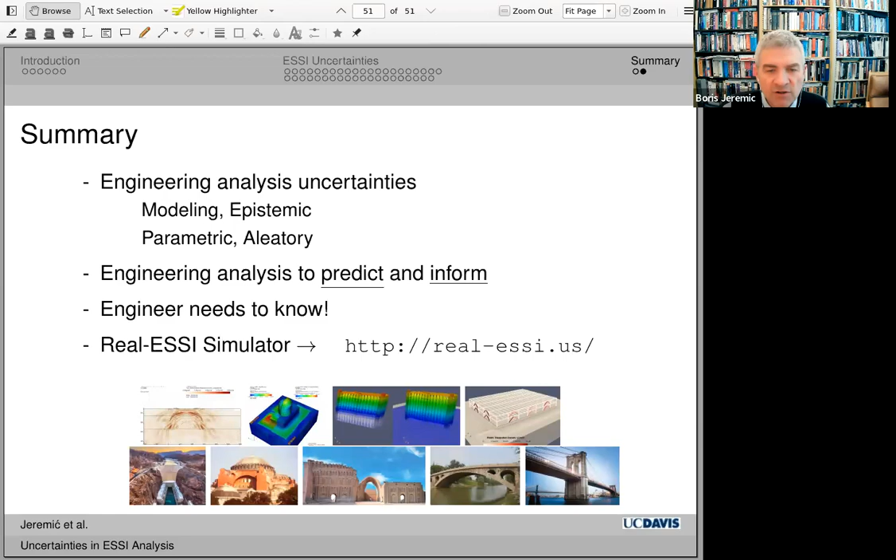Okay, so. Yeah, I don't see those questions. Can I stop sharing my screen so I can share again? Yeah. If you would like, you're able to open up the question and answer and start that discussion on your own. I don't need to redirect those questions. Okay, so chat. Please, yeah, read them out loud for us. I don't see them in chat. I see in Q&A. Okay, I see. So Ahmed, when I click on Ahmed, nothing happens. Hold on, let me do Q&A again. Oh, I see. I'm sorry.

Great. Thank you very much for the presentation. Could you please talk more about what is the computational cost of the stochastic finite element method? And will the cost increase with the larger number of uncertain inputs? Yes, the cost is large, but it's a couple orders of magnitude less than Monte Carlo to get the same accuracy. You end up with a much larger system, because what you essentially do, you take every single degree of freedom and you expand those degrees of freedom into polynomial chaos, into uncertainty eigenspaces. And the system becomes much, much larger.

But again, it is much more computationally efficient than Monte Carlo. So in that sense, you're right. It is more computationally intensive, more costly, but it's better. It is cheaper and more accurate than Monte Carlo.

Second question. Amin. Hey, Amin. Hello. Thank you for your presentation. I have a couple of questions. I'm not sure if I agree that the material randomness is an aleatory type. Well, epistemic. Okay, so yes, and we do this game. We play this game of moving the border between aleatory and epistemic.